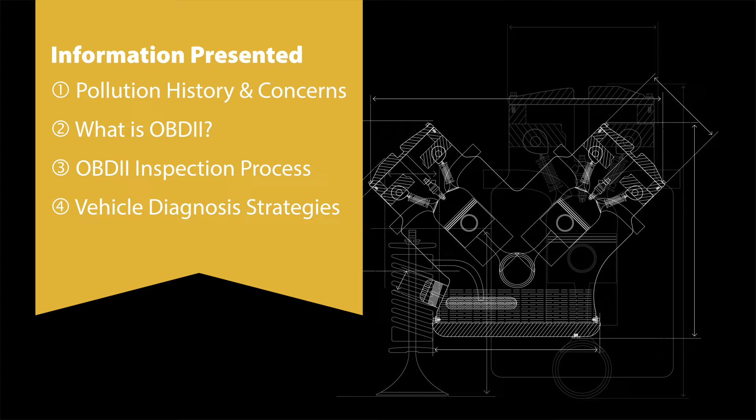To start, let's talk about the history of air pollution. While it has existed since the beginning of time, cities and the vehicles within them have caused an exponential increase to air pollution in the last century.

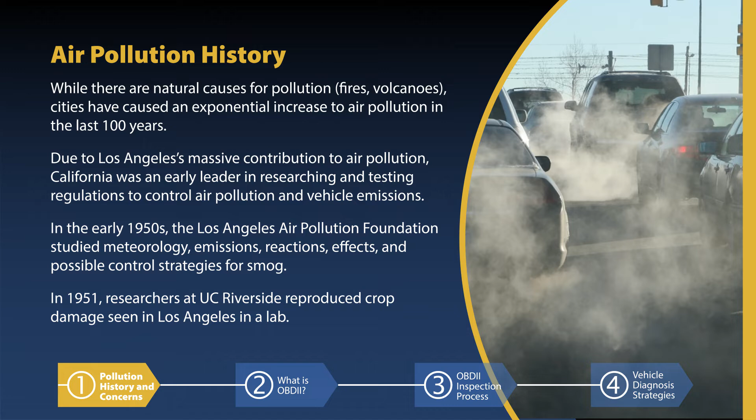During the early 1950s, California scientists began researching the effects and possible control strategies for smog. Researchers in California realized that vehicles were a major source of air pollution and began to require emissions controls on vehicles. Recognizing that other states had similar air pollution problems, the U.S. Environmental Protection Agency, or EPA, adopted their own regulations.

Because California had regulations prior to the federal requirements, they are allowed to keep their own vehicle emissions control regulations. This is why we have both California vehicles and 49 state vehicles, otherwise known as federal vehicles.

50 state vehicles are certified to both U.S. EPA and California standards. The California vehicle standards, used by 13 states including Vermont, may have an extended emissions control system warranty, which is a valuable benefit to Vermonters. Most of the public is unaware of this benefit.

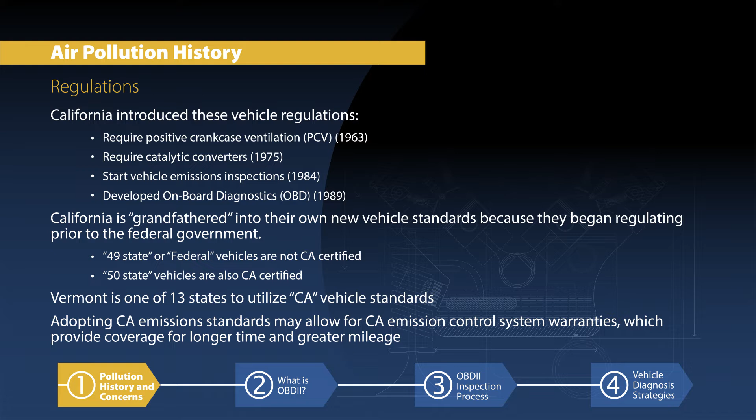Ground-level ozone is the primary pollutant of concern. Oxides of nitrogen and hydrocarbons, which are emitted from vehicles, as well as other sources, form ozone when combined with air and sunlight. Particulate matter, otherwise known as PM or particles, mostly comes from diesel vehicles, although some gasoline-fueled vehicles with direct injection engines create particles as well.

In the last 10 years, we have seen new regulations requiring emissions controls of heavy-duty trucks, such as diesel particulate filters, or DPFs, and selective catalytic reduction catalysts, called SCR catalysts, resulting in cleaner diesel vehicles.

Carbon monoxide, sulfur dioxide, and lead do not pose significant problems in Vermont, due in large part to the effectiveness of vehicle emissions controls. Other toxic and carcinogenic air pollutants, such as benzene, are a significant concern in Vermont because they are known or suspected of causing cancer and pose a threat even at very low levels. The vehicle inspection program helps ensure that emissions of toxic pollutants are minimized.

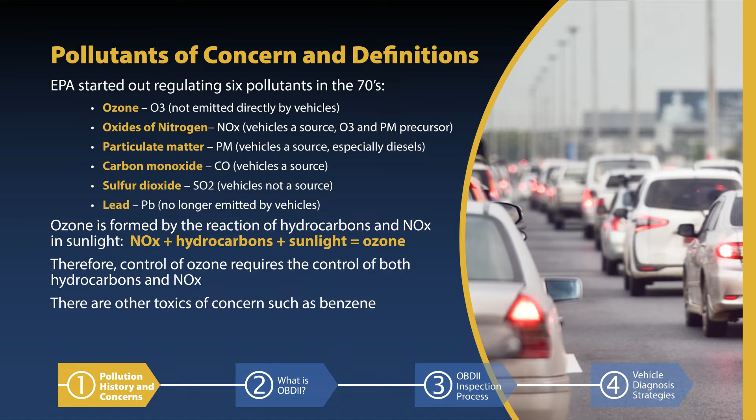So now that you know more about pollutants, let's look at the impacts they have. Ozone is a problem because it affects public health and can cause damage to plants and materials. The US EPA has set a standard of 75 parts per billion as the maximum concentration to be allowed in the air to protect public health.

Vermont needs to maintain several strategies, including the vehicle inspection program, in order to avoid exceeding the current ozone standard.

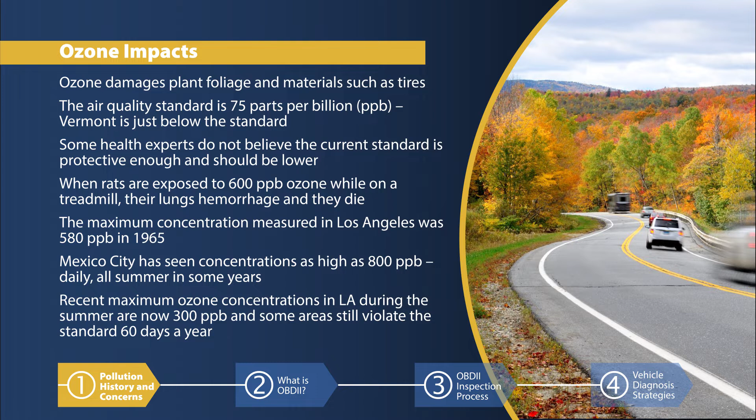A primary purpose of the Vermont Vehicle Inspection Program is to help ensure that vehicle emissions control systems are working as designed. Vermont has inspections performed at private facilities, and the state allows testing and repairs to take place at the same facility. The program is enforced by requiring vehicles which pass inspection to display a sticker indicating compliance with both safety and emissions requirements.

All vehicles in Vermont receive a safety test. All vehicles receive a visual emissions inspection for a catalyst, if equipped, and a fuel cap. Gas vehicles built in 1996 or later, and diesel vehicles built in 1997 or later that meet certain weight requirements also receive an OBD2 emissions test.

Onboard diagnostics, or OBD systems, are an electronic means to control engine functions, monitor the vehicle emissions control system, and assist with diagnosing emissions control and engine problems. It was developed as a way for a vehicle to monitor its own emissions and immediately let a vehicle owner know when there is a problem.

This allows problems to be detected between emissions inspections so that vehicle owners will be more likely to get repairs when problems occur and they are less expensive to fix, rather than waiting until they grow into larger, more expensive issues.

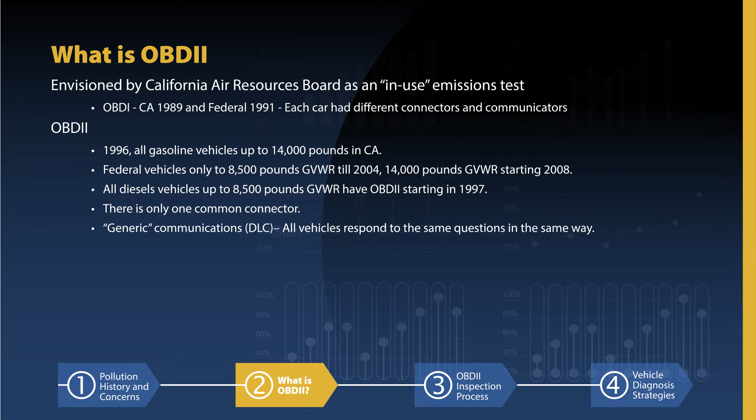Vehicles equipped with OBD2 include most gasoline and diesel-fueled vehicles up to 14,000 pounds GVWR. OBD2 uses standardized communication protocols to vehicle computers through a common standardized connector, so all vehicles respond to the same question in the same way.

The 16-pin Diagnostic Link Connector, or DLC, has 7 standardized pin assignments, with the remaining 9 left for vehicle manufacturer-specific use. Pin 16 provides power, meaning the scan tool does not need its own power source. Vehicles 2008 and newer all use the electronic language called Controller Area Network, or CAN.

Older models may speak one of 5 different languages. The language a vehicle speaks is based on its age and make, and the scan tool recognizes all electronic languages regardless of vehicle make, model, and year.

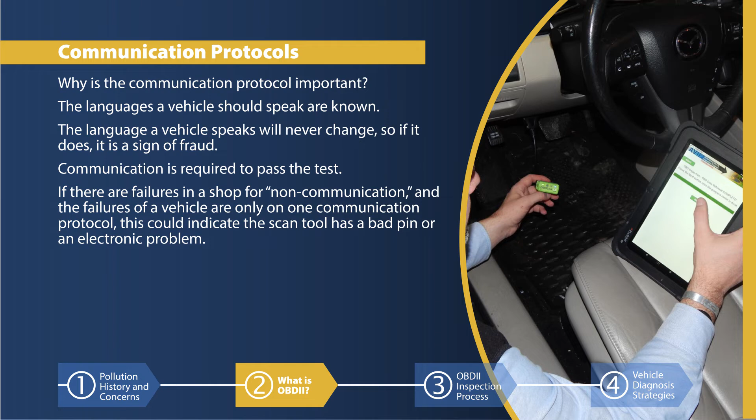Because the communication protocols are standardized by vehicle year, make, and model, the state can use the communication language a vehicle speaks during the test to detect fraud, if the vehicle's language is incorrect or changes between inspections. In order to pass an OBD2 inspection, communication between the vehicle and the scan tool is required. If a vehicle fails due to non-communication, but the failures are only on one communication protocol, this could indicate a problem with the scan tool.

OBD2 emissions inspections are simple, fast, and economical, providing large environmental and health benefits for all Vermonters. The proper functioning of the vehicle emissions control system is determined by the OBD2 in the vehicle and is not dependent upon a technician's judgment.

The overall pass or fail decision is also electronically determined by the inspection software. However, the status of the check engine light, or MIL, lets the vehicle owner know before the test if they may pass or fail the emissions inspection. Emissions-related problems are indicated by the MIL being illuminated. The only reason the check engine light will come on is if there is an emissions control system problem.

It is important to help motorists understand why the check engine light is critical to preventing high emissions and high-cost repairs. If a vehicle is under warranty and the check engine light comes on, the vehicle manufacturer is obligated to make the repairs for free to turn the light off. No matter how long it takes or how much it costs, there is no financial impact to the vehicle owner during the warranty period.

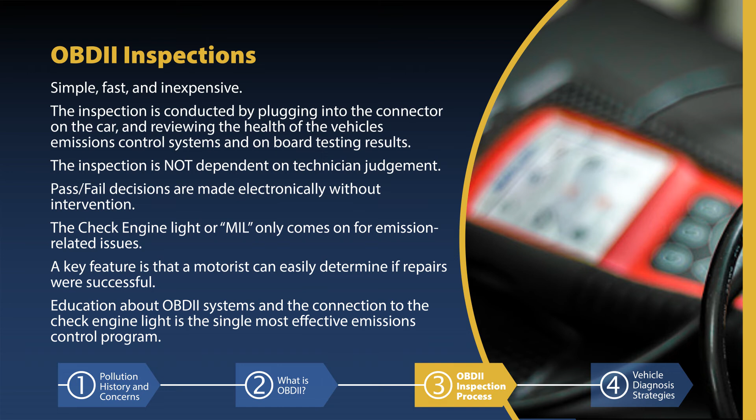At the end of the inspection, the AVIP inspection tablets will automatically determine if the vehicle passes or fails. In order to pass, the check engine light must work, must not be illuminated while the vehicle is running, the DLC must be accessible and communicate with the scan tool, the vehicle must have no more than 2 monitors not ready, and the MIL must not be commanded on.

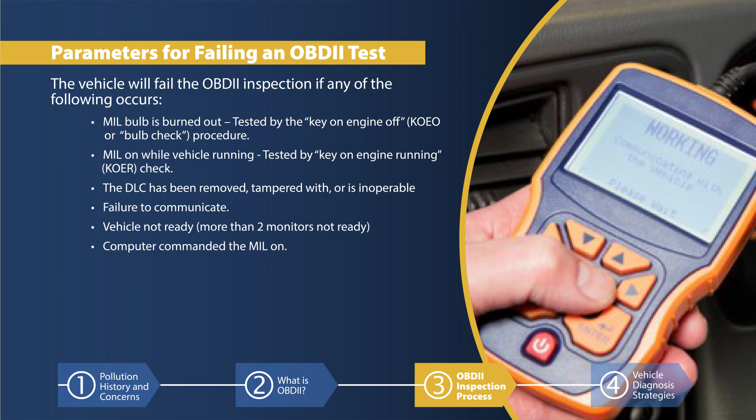Some vehicles are excluded from certain test requirements, and the AVIP inspection tablets will recognize these vehicles. If a vehicle has less than 1,000 miles, it is excluded from the readiness requirements, as are certain vehicles which are known to never report being ready.

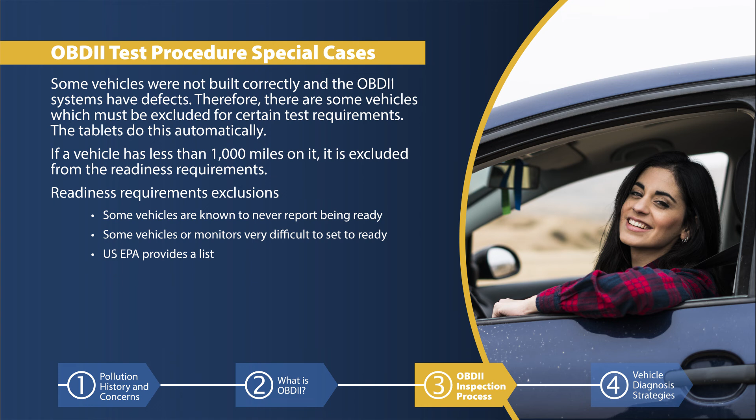When a vehicle fails its OBD2 inspection, it often means the vehicle needs service or repairs. Some of these repairs may be covered under the vehicle's warranty, so it is important to check the warranty status of failing vehicles. If a vehicle appears to still be under warranty, advise the owner to contact the local dealership to see if the repair is covered. If it is, the repair will be at no cost to the motorist.

If the repairs would not be covered under the vehicle warranty, and you have the skills and equipment necessary to do so, your shop can make the repairs. However, if you cannot make the repairs in your shop, there are some shops that specialize in repairs of emissions control systems. Referrals to these shops may be a good alternative.

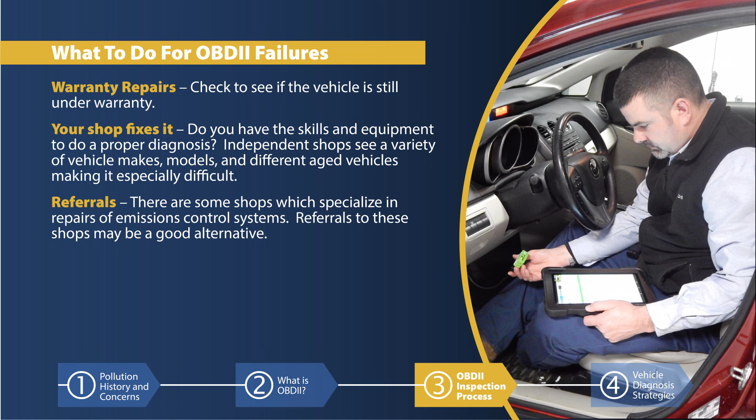The Diagnostic Trouble Code, or DTC, will point you to the best diagnostic process to follow. You can find diagnostic flow diagrams at the vehicle manufacturer's website and many other repair support websites.

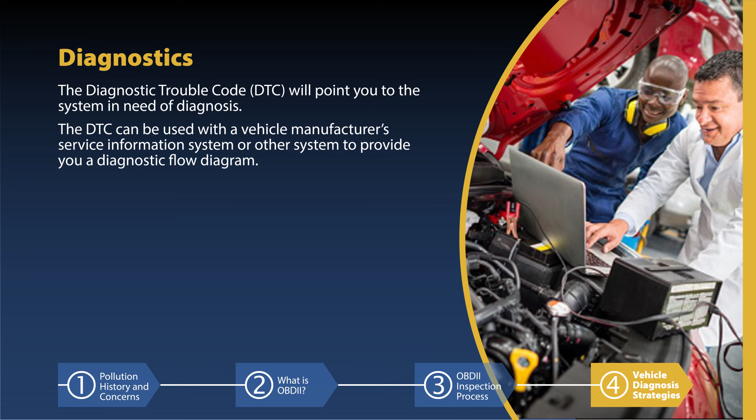Other OBD2 diagnostic resources include Vermont's Diagnostic Training, and ASE Training, which includes the A1 Engine Repair, A6 Electrical Electronic Systems, and A8 Engine Performance Certifications. Also available as part of ASE training are the T1 Medium Heavy Duty Truck Gasoline Engines, T6 Medium Heavy Duty Truck Electrical Electronic Systems, and L1 Advanced Engine Performance Specialist Certifications.

AA1car.com offers free OBD diagnostic overview material, and general OBD2 information can be found online at obdii.com. There are many websites that offer simple diagnostics based on DTCs, including obd-codes.com.